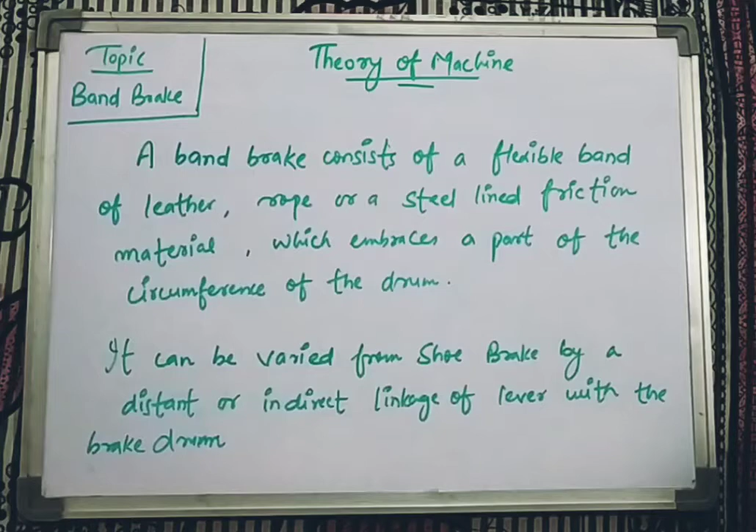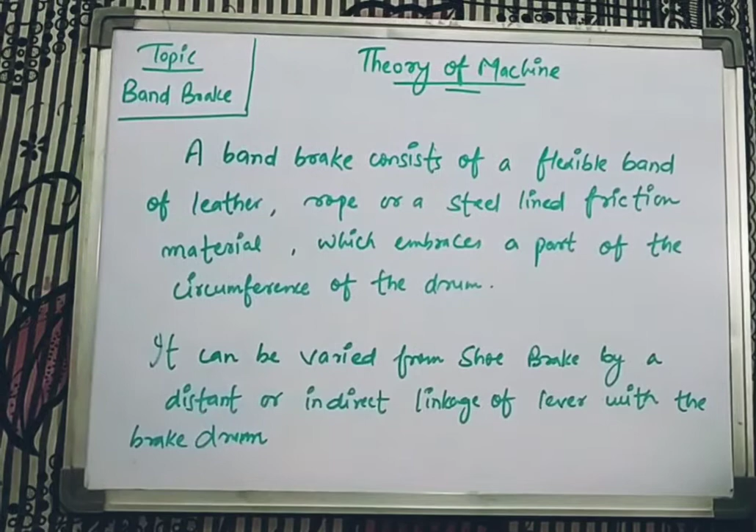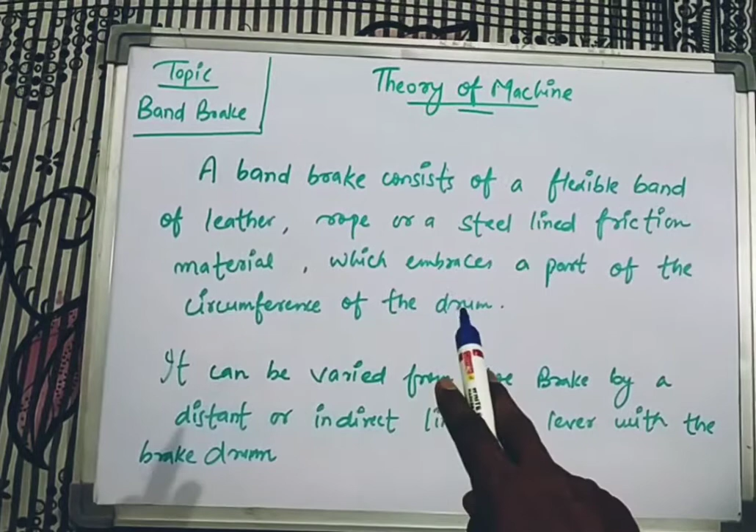So let's start with the definition of band brake. A band brake consists of a flexible band of leather, rope, or a steel lined friction material which embraces a part of the circumference of the drum.

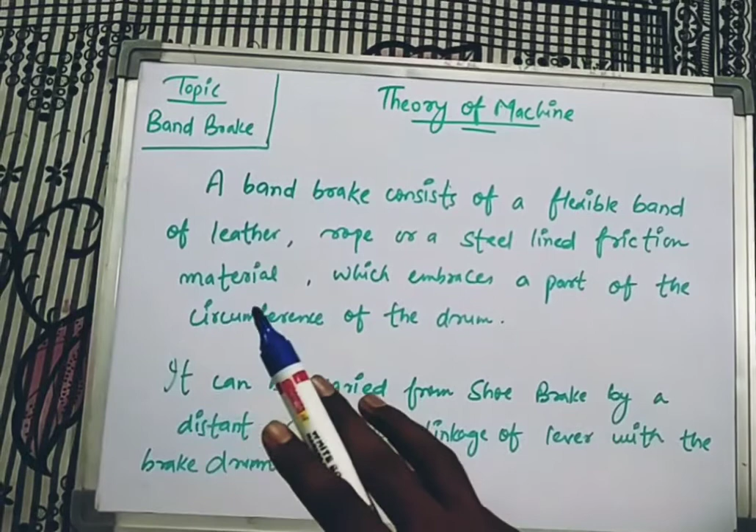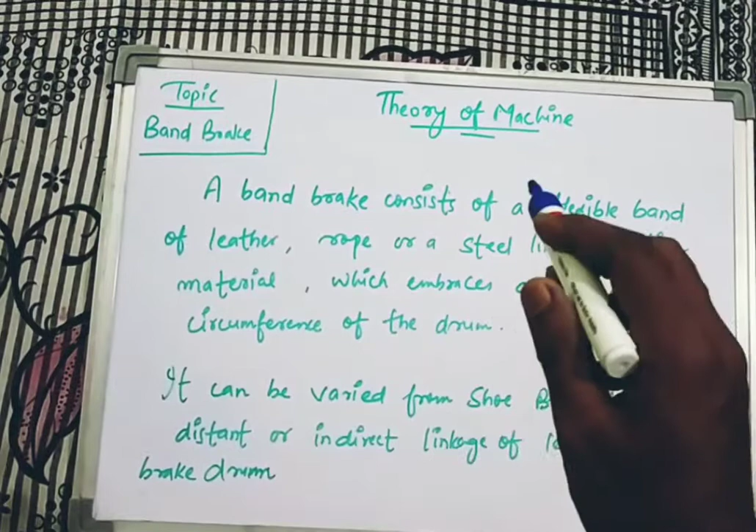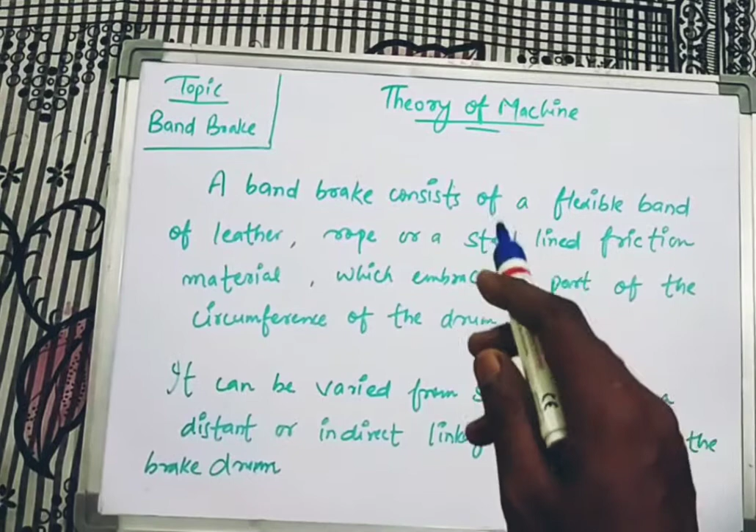In the previous class we already discussed the shoe brake. In the shoe brake there is a block and a wheel in direct contact, and when a load is applied on the lever above the block, this load presses the block and indirectly presses the wheel, and through that the brake is applied.

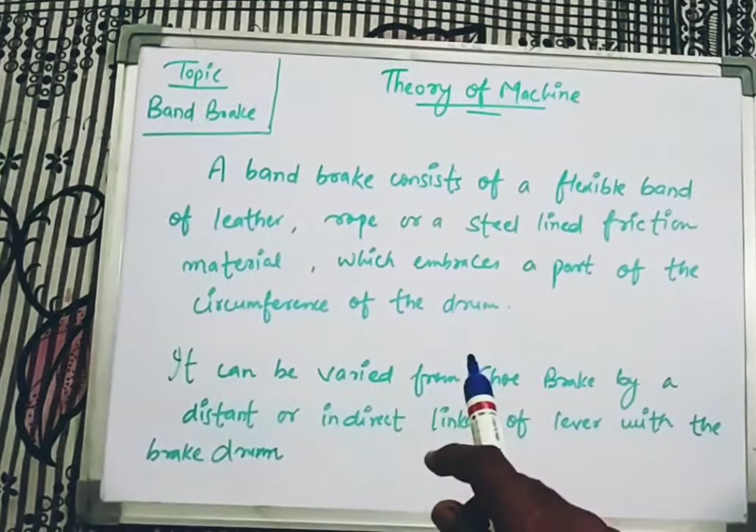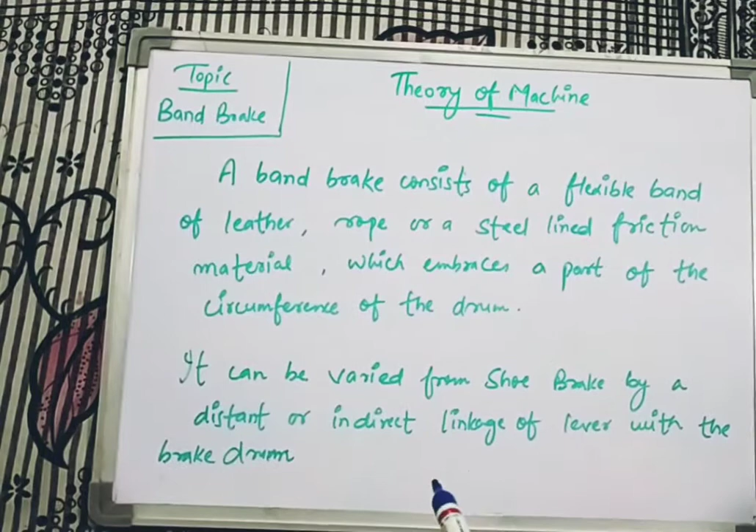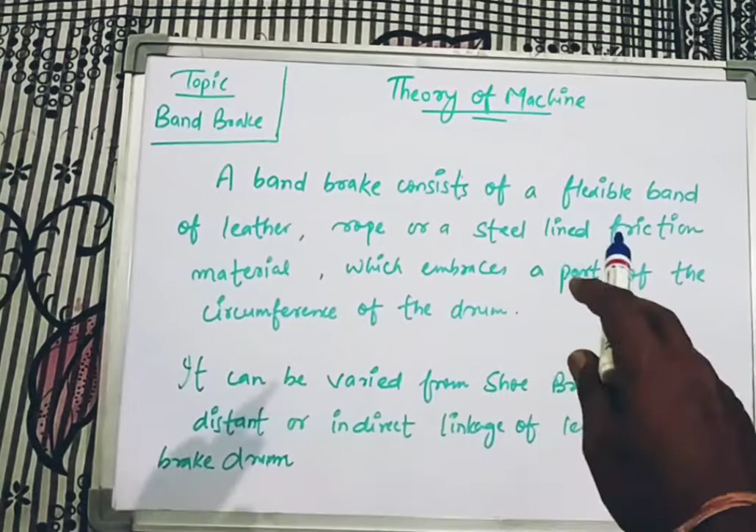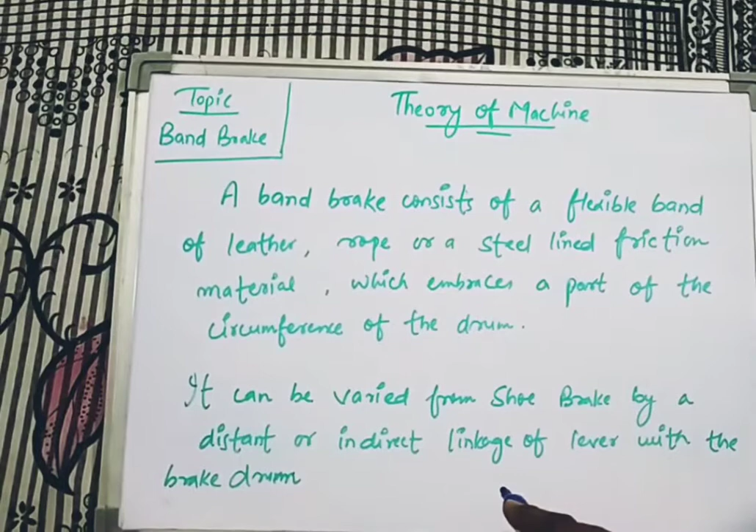In the situation of band brake there is a slight change - it varies from the shoe brake by distant or indirect linkage of lever with the brake drum. That means there is no direct linkage of brake drum with the lever; instead there is a linkage done by leather, rope, or steel lined friction material. The wheel and the lever will not be in direct contact, rather it will be linked through a rope or leather belt.

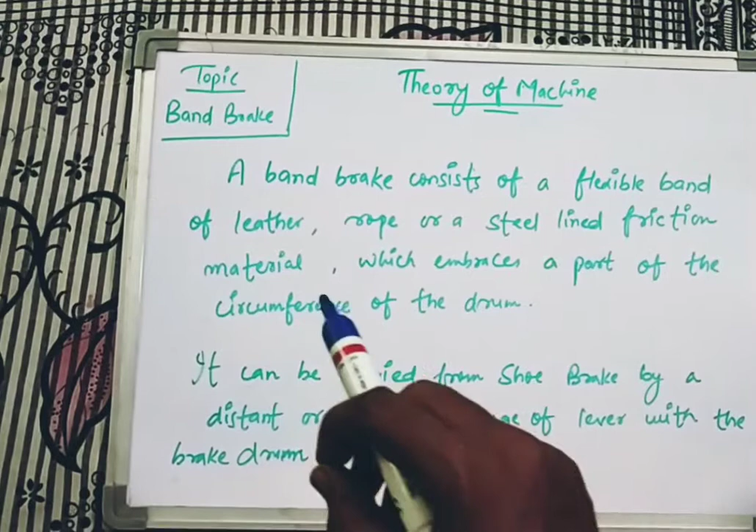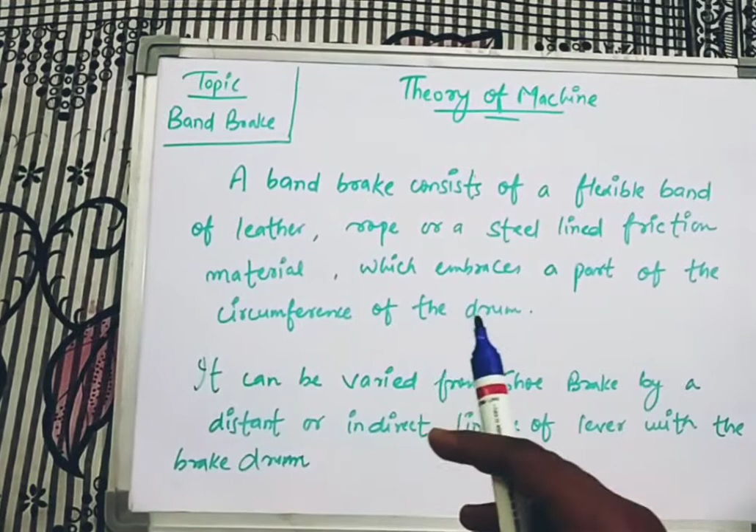So this type of arrangement is commonly known as band brake. In other words, if the wheel of any vehicle is not in direct contact with the lever and is indirectly contacted with the help of a leather belt, rope, or any steel lined material, this type of arrangement of brakes is commonly known as band brake.

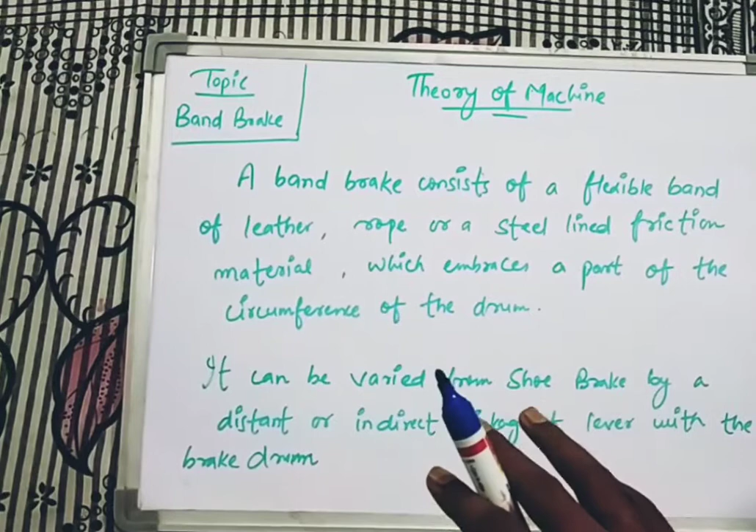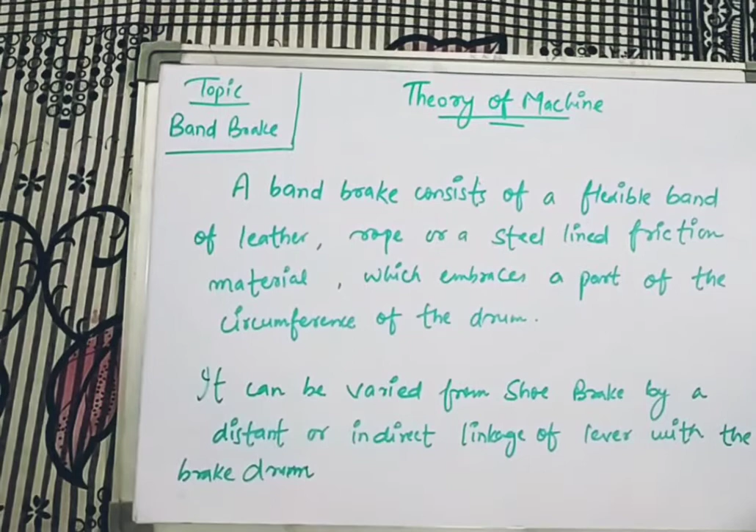So for more clarification, I will draw you the figure or arrangement of band brake. It will help you clarify the mechanism of band brake. Now coming back to the mechanism part of band brake, how this works.

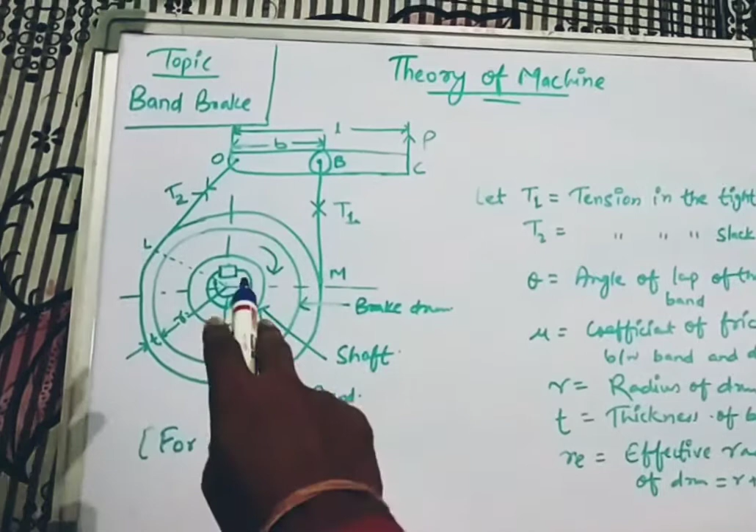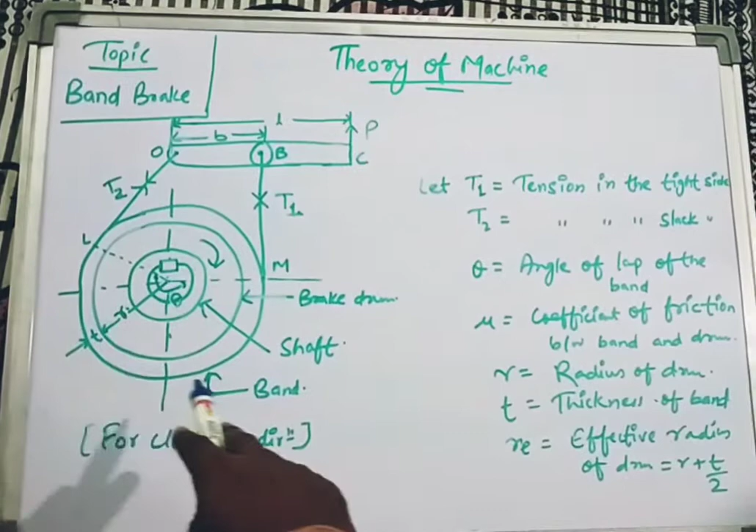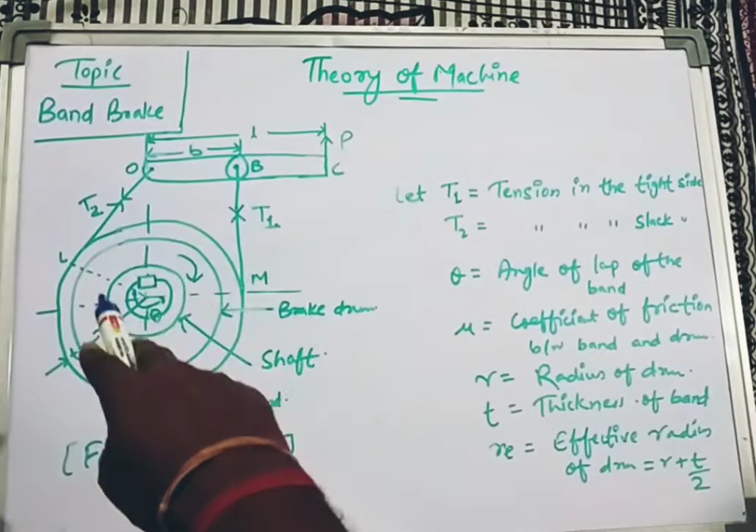This is a typical arrangement of band brake. This is the upper section, this one is a lever denoted by C. O is the fulcrum point, and the outer section of this wheel is brake band, and the inward wheel is the brake drum, inside which the shaft is aligned. There are 2 points attached with the fulcrum, one through point B, another through fulcrum point O. There are few nomenclatures given which I will discuss further.

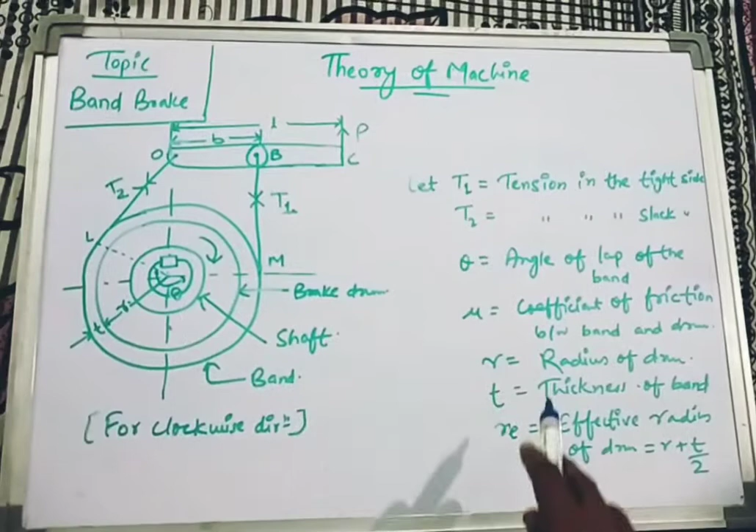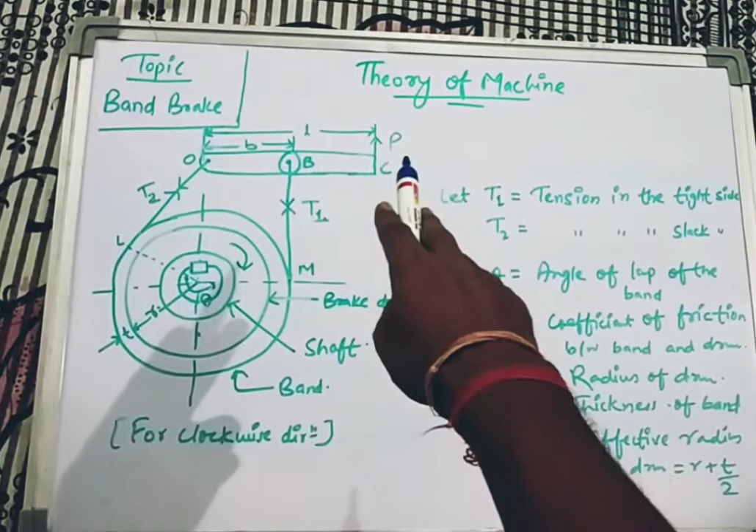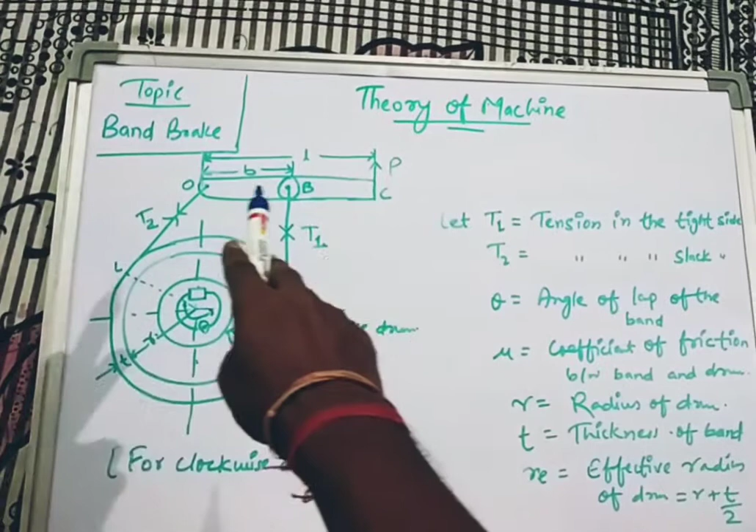Before starting the nomenclature, let me tell you how this band brake works. There is a load at the end of this lever denoted by P - the force being applied at the lever. When this P force is applied, this force travels throughout the lever at fulcrum point O, and since O is connected with this brake drum and also with the band, this ultimately tightens this band or leather portion.

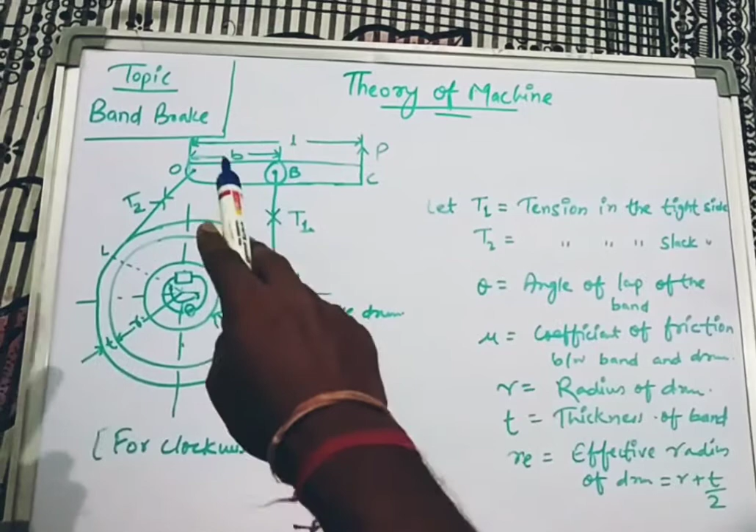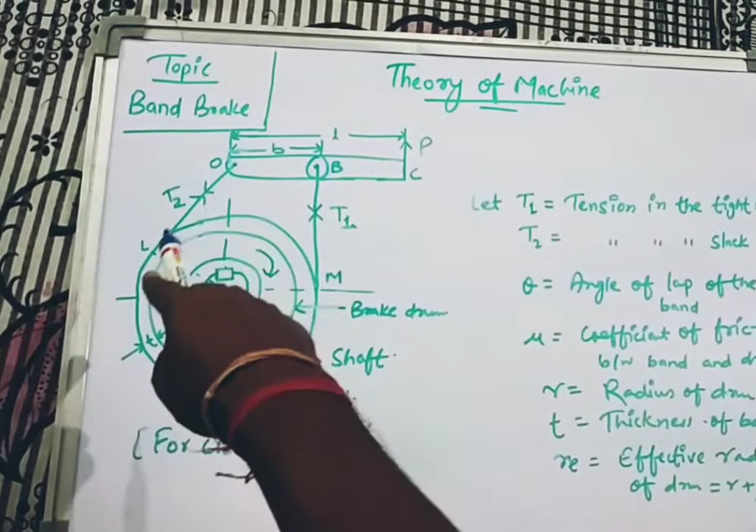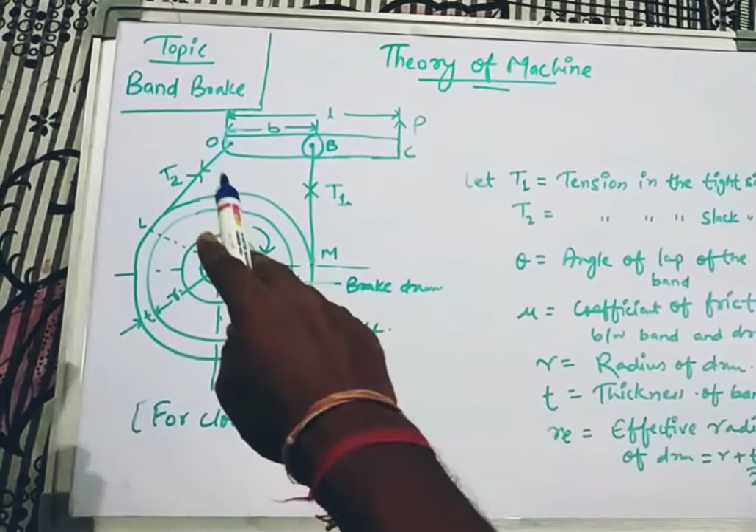What I mentioned is the tension, that is T2. This will ultimately tighten this side or slacken this side, or reversely slacken this side or tighten this side. So when the load is applied, tension is applied on that leather form - it can be either rope, leather belt, or any steel lined material.

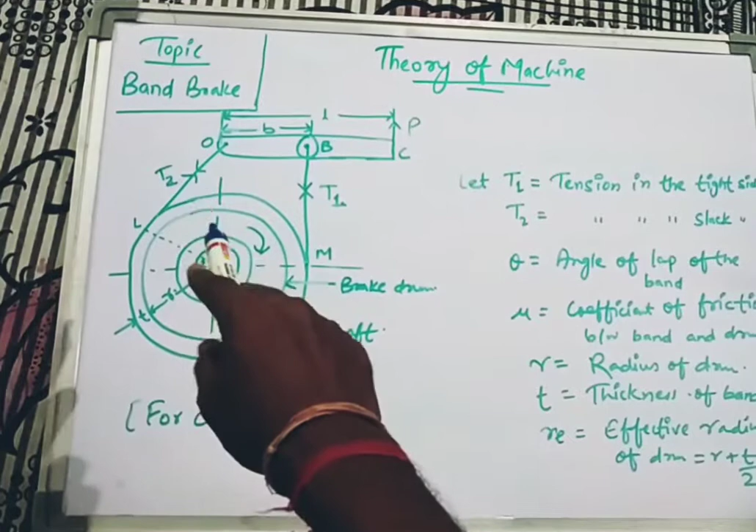Tension is applied on that position, and due to that the wheel develops a frictional force, since this is a friction material, so due to the presence of coefficient of friction, a frictional force is applied at the band, and due to this the brake will be applied.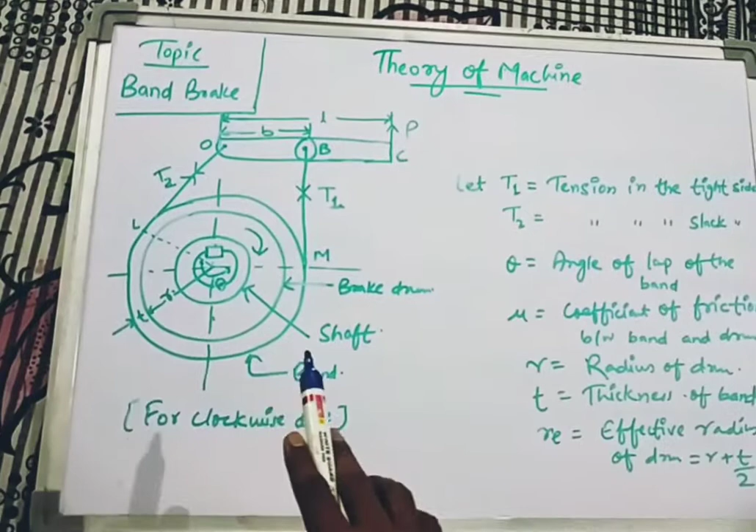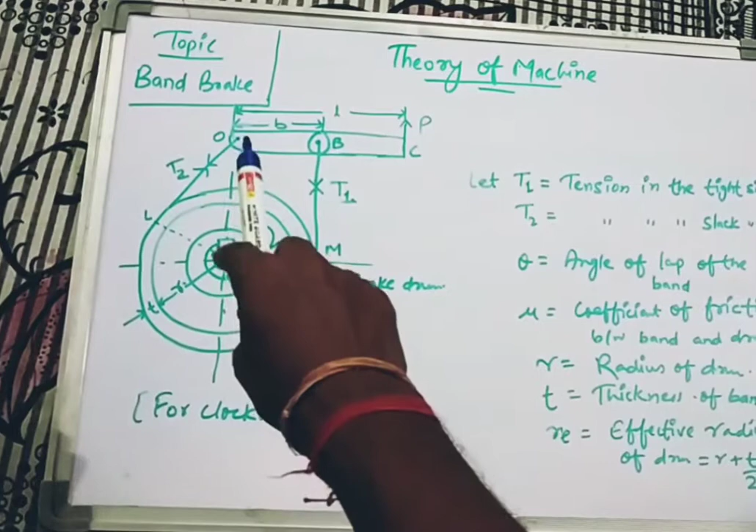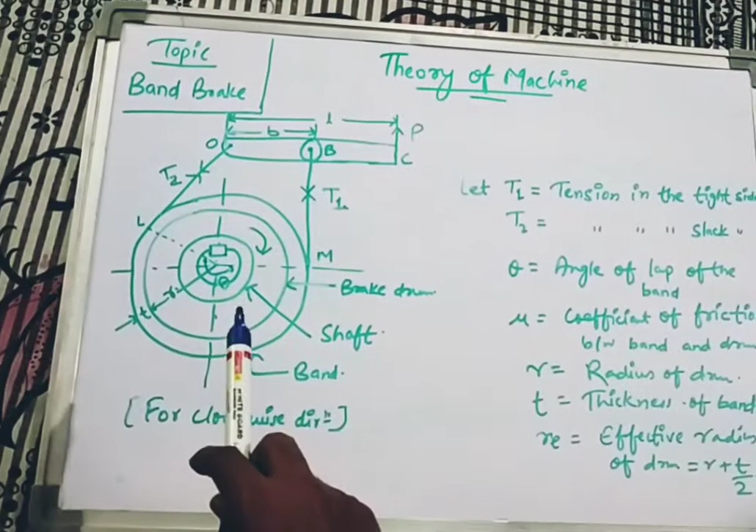In simpler words, when a force P is applied at the lever, this goes throughout to the fulcrum pin, since it is connected with a leather or rope portion, so tension will develop. This tension will develop a frictional force throughout the band and the brake drum, and due to that at the final position the brake will be applied. I hope you understand the mechanism portion.

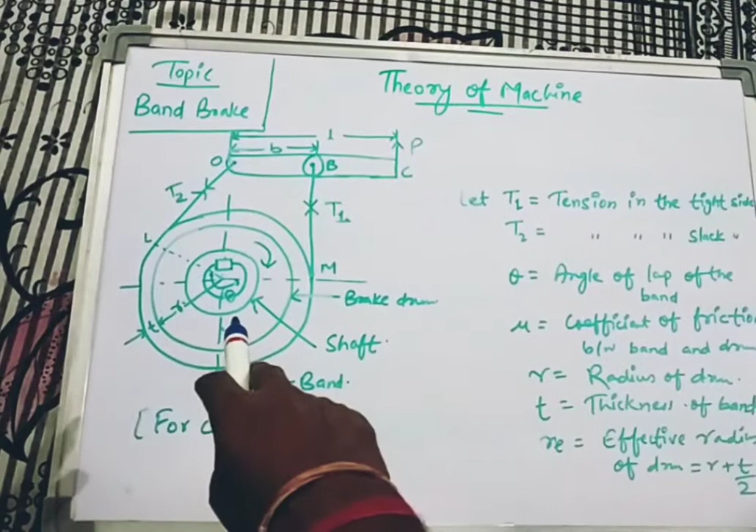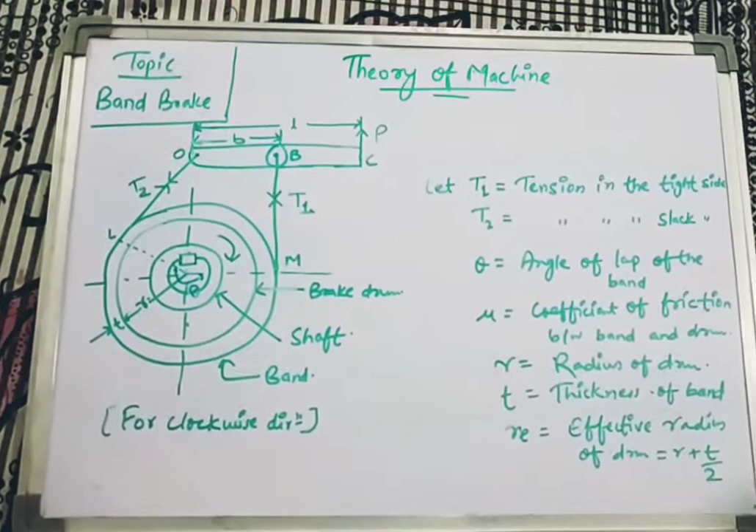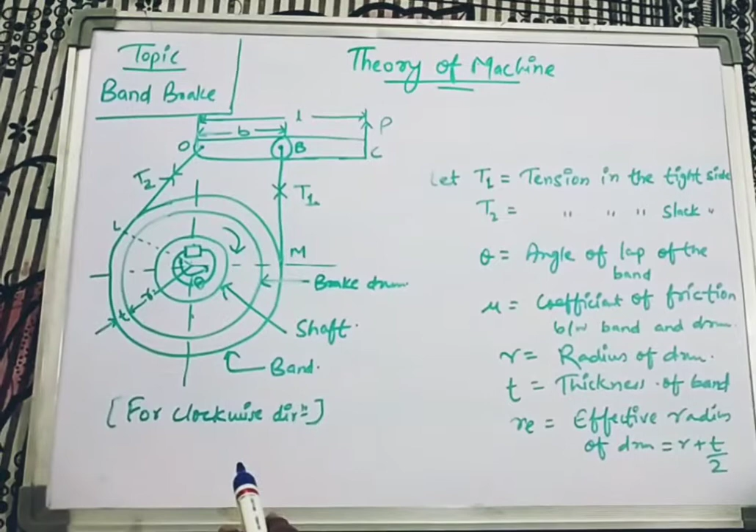Now let me tell you the few nomenclatures which I have mentioned and given in the figure. T1 is the tension in the tight side. T2 will be the tension in the slack side. Let us suppose T1 is mentioned here, so this will be the tight side and this will be the slack side. Since it is in clockwise direction, it can vary from a directional point of view.

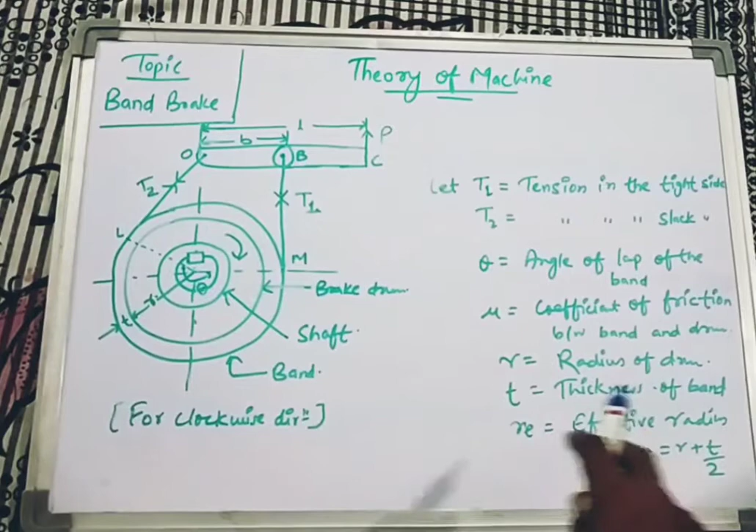Theta will be the angle of lap of the band, mu is the coefficient of friction between band and drum, r is the radius of the drum, T will be the thickness of the band, and re will be the effective radius, given by R plus T by 2.

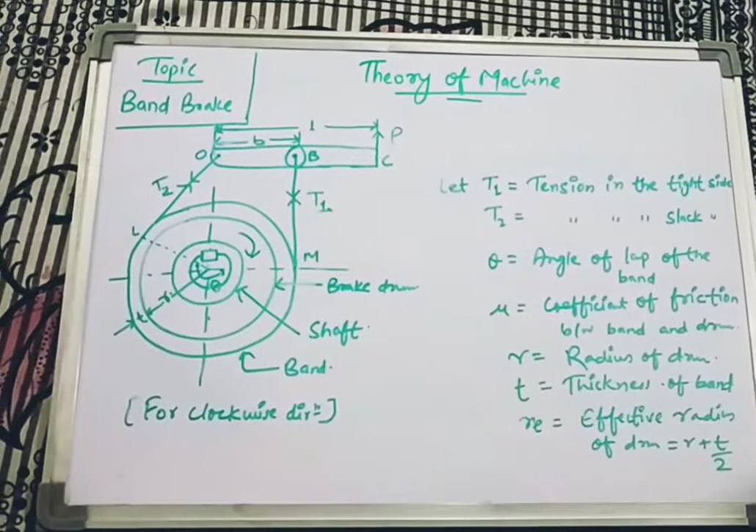So these are the few nomenclatures, and now we will discuss with the explanation part how this works. So now coming to the mechanism part.

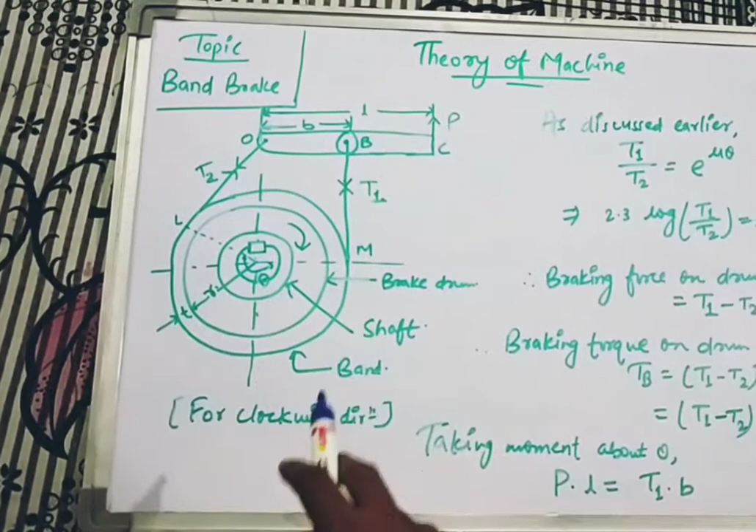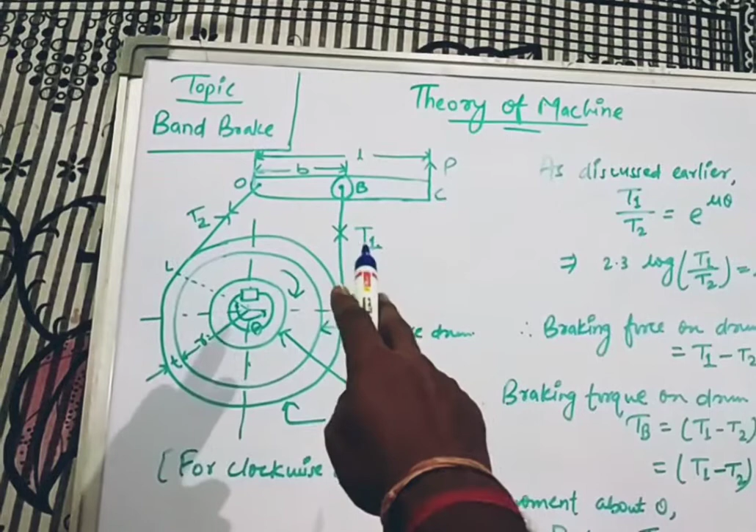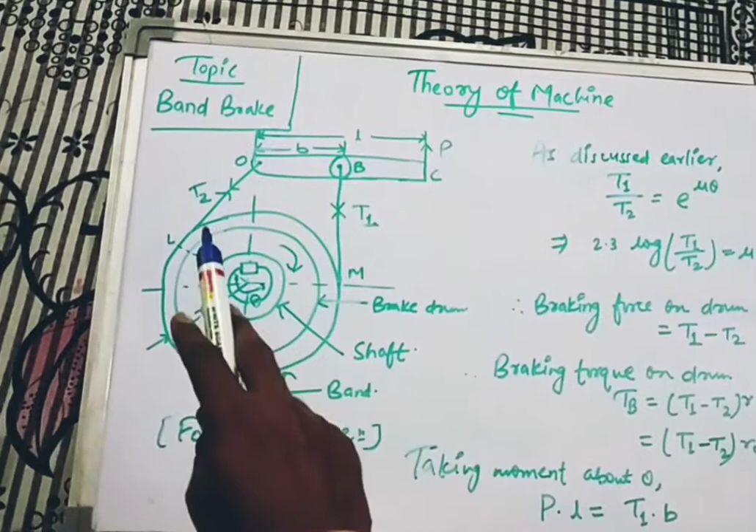So this is the band brake situation considering the clockwise direction. When we consider the clockwise direction, this side, denoted by T1, will be the tight side, and T2 will be the slack side. But if we consider the anti-clockwise direction, the situation will ultimately reverse. So now first taking the clockwise case.

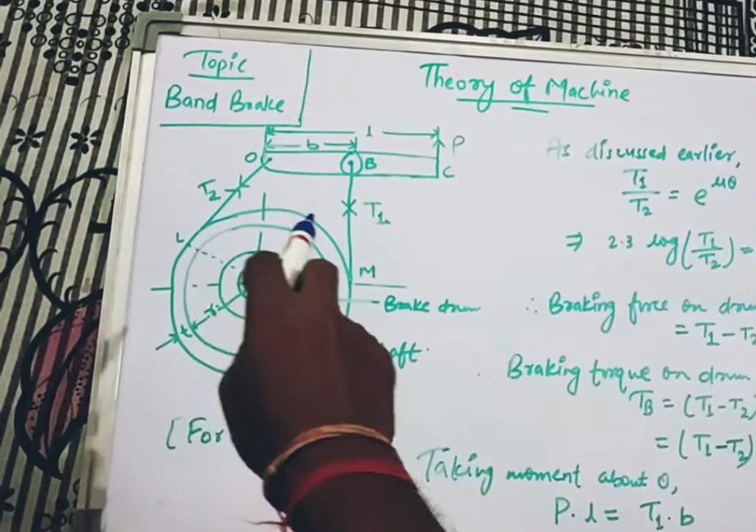I've already discussed that this load ultimately puts tension on this rope or belt, and this will implement a braking force on the band or brake drum, which will at last apply or amplify the brake.

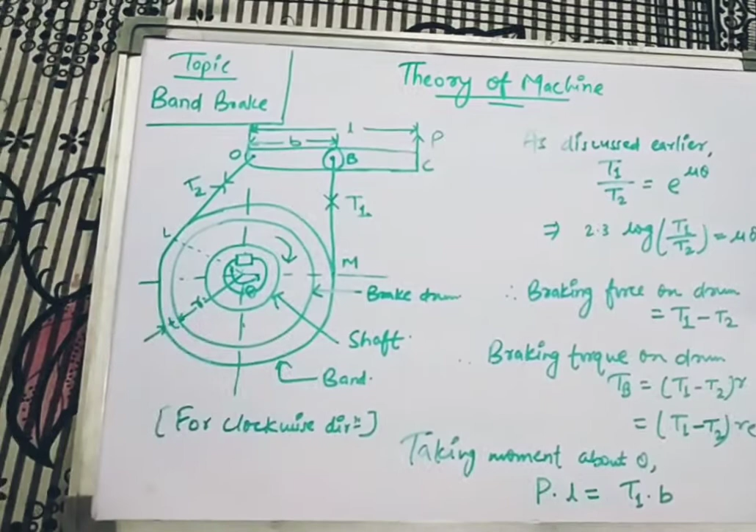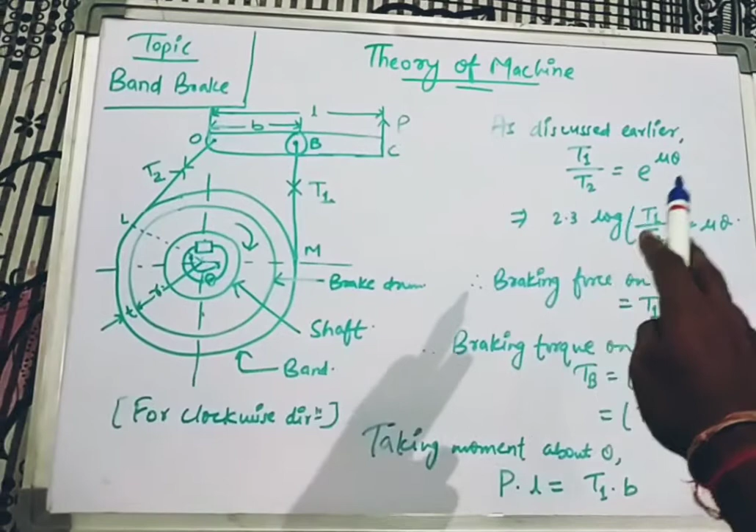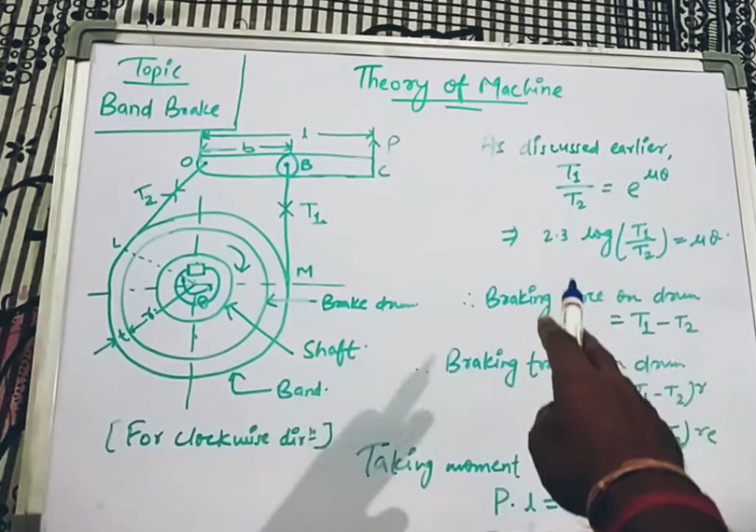As we discussed in the belt drive or rope drive, we got a formula, the ratio of tensions, given by T1 by T2 equals to e to the power mu theta. We have already studied about this in our previous chapters. On taking log both sides, we can get through this formula, that will be given as 2.3 log T1 by T2 equals to mu theta. I have already discussed about this in the previous chapters.

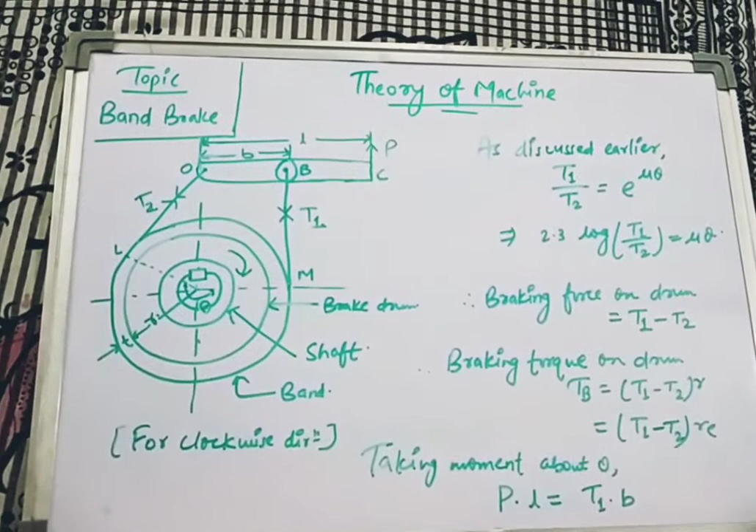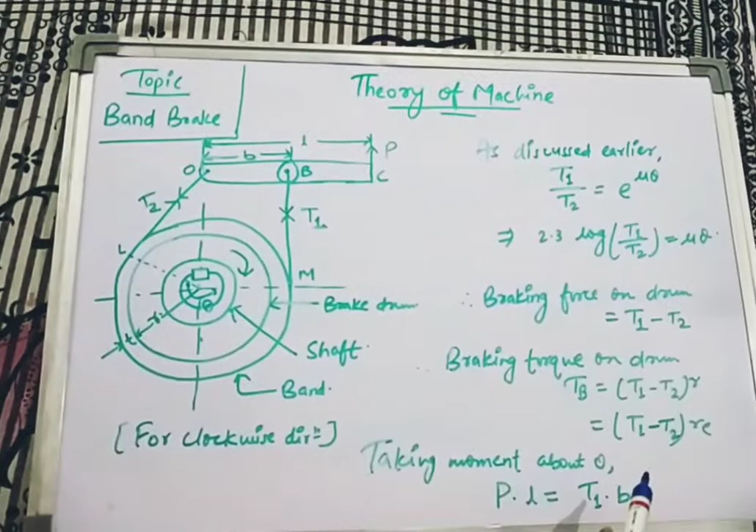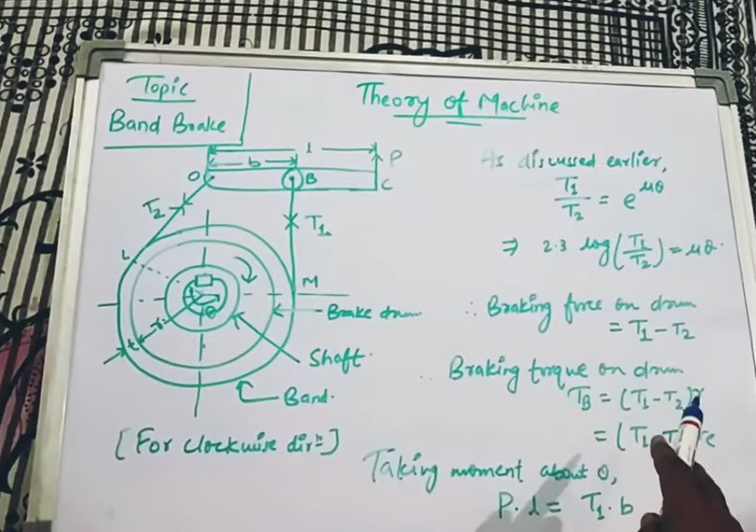So now if we have to calculate the braking force on the drum, that will be given by the difference of tensions between these two ropes, T1 minus T2. Similarly, the braking torque - torque is force into the radius or perpendicular distance. So that will be given by TB equals to T1 minus T2 into R, where R is the radius, or it can also be written as T1 minus T2 into re, where re is the effective radius.

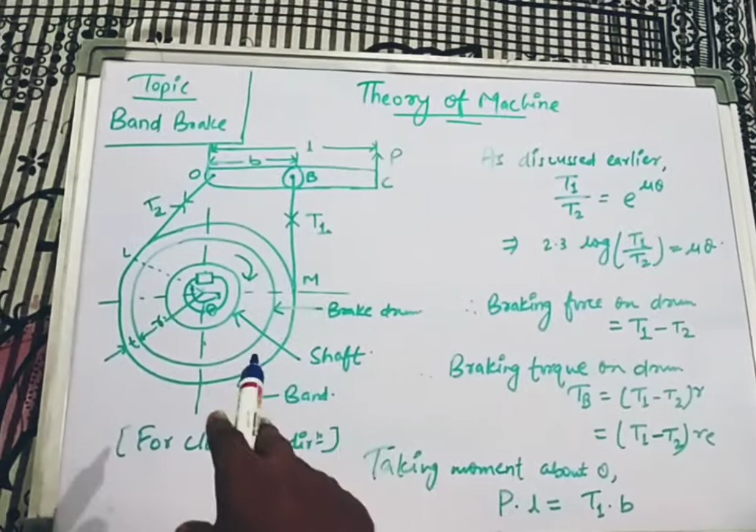In effective radius, I have already discussed that we consider the thickness of the band also. So if the thickness of the band is given, then you will go through this formula. If the thickness is not given, then you will go through this formula.

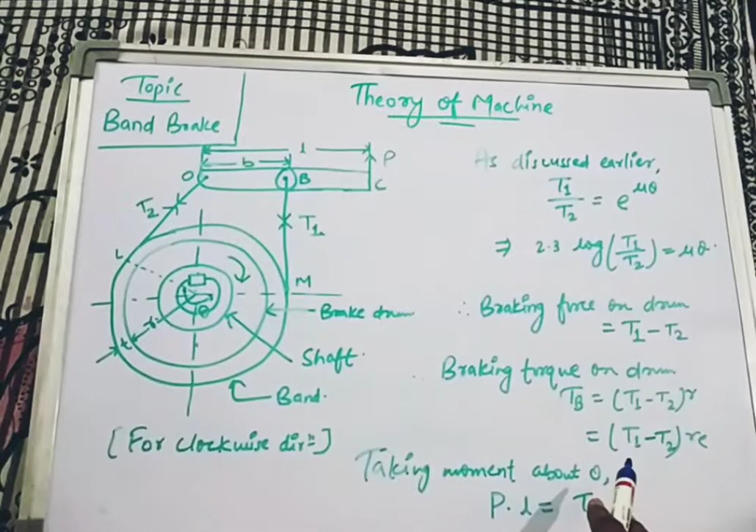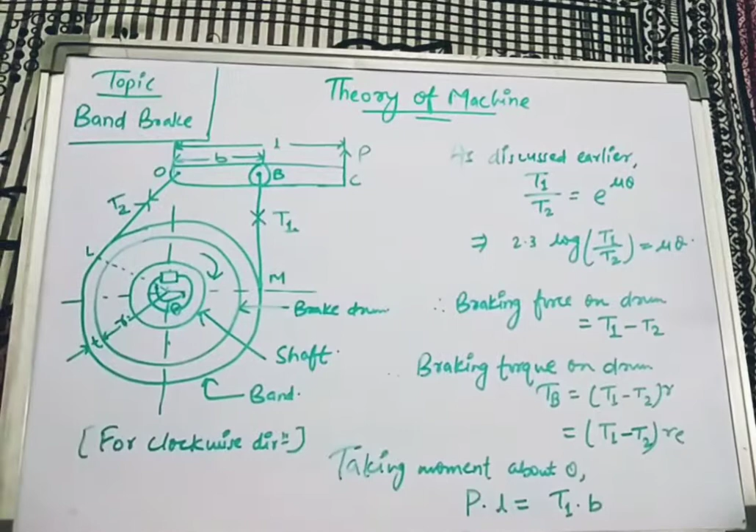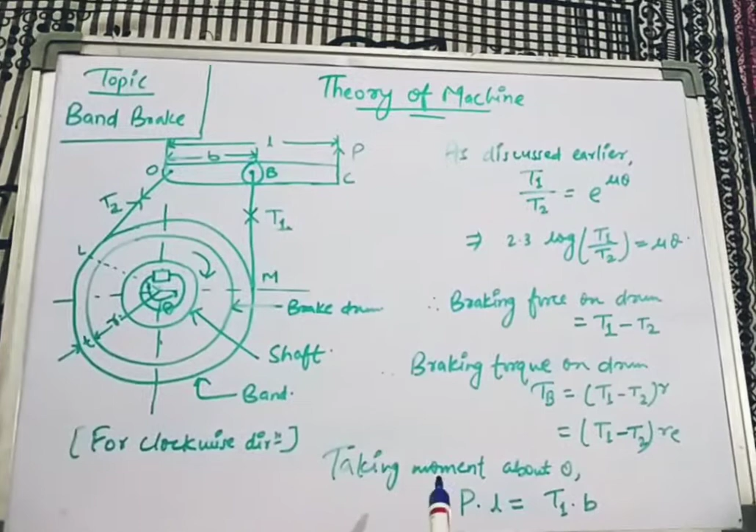So now the final point, how to calculate this P, the force, or T1 if sufficient data is not given. For that portion, as in our shoe brake, we did the steps of taking moment. So we'll do the same here also, taking moment about point O.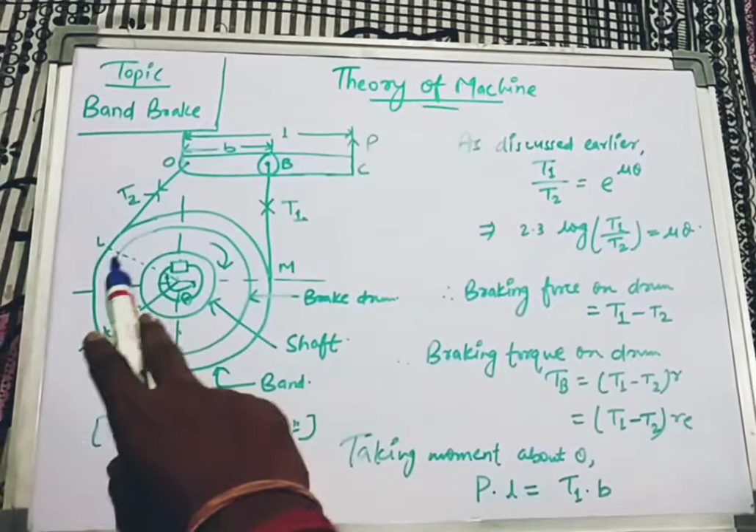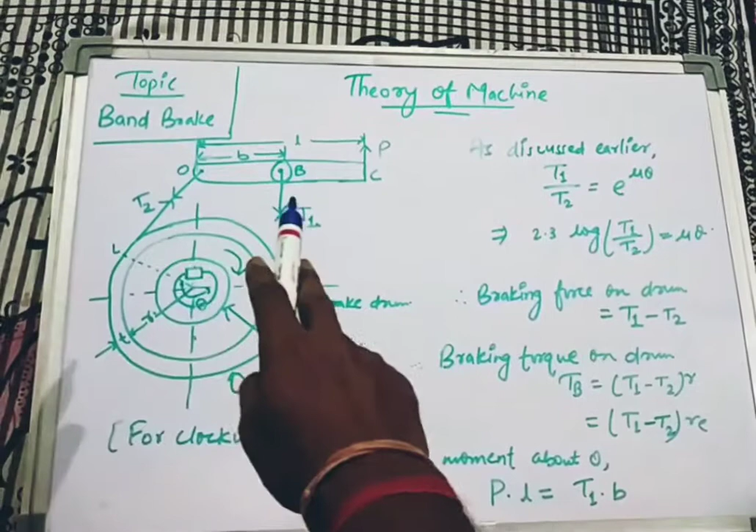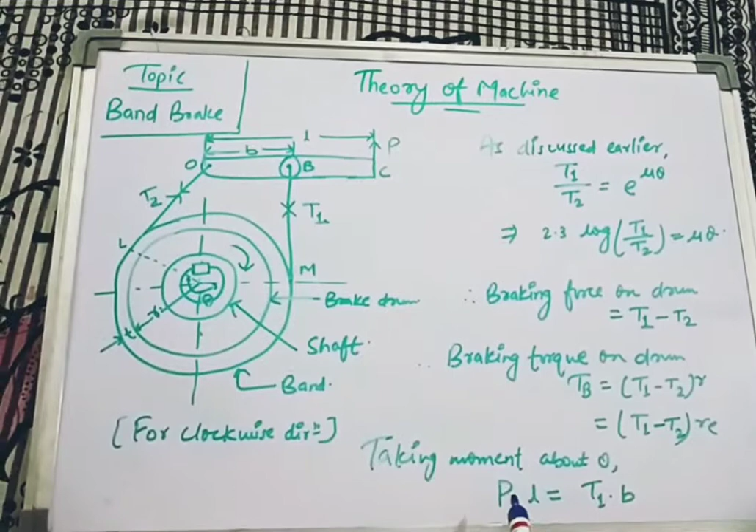On taking moment about point O, we get three forces actually, P, T1 and T2, but for T2 there is no perpendicular distance, so we will not consider this one. We will consider only T1 and P. For the force P, the perpendicular distance will be L, and for the tension T1, the perpendicular distance will be this distance B, since we are taking the moment about point O. So taking moment about point O, we get this formula: P into L equals to T1 into B.

So this is the whole scenario of band brake, and this is the case of band brake while we take the band or brake drum moving in clockwise direction. I hope you understand this.

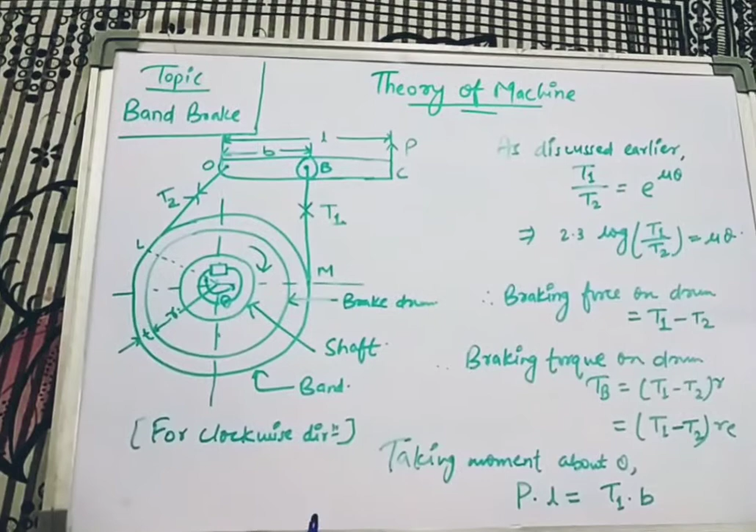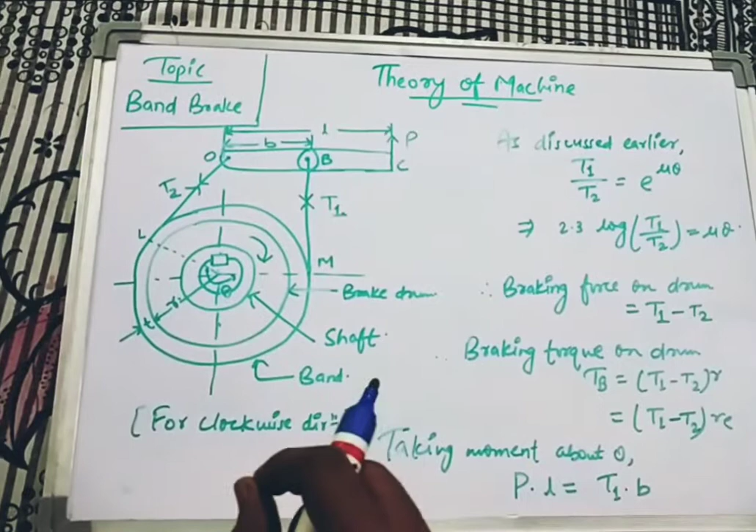Now let's get to the point if the band or the brake drum moves in anti-clockwise direction. There will be a slight change in the diagram and in the mathematical equation which I will provide you. So this is the case for band brake when the brake drum moves in anti-clockwise direction.

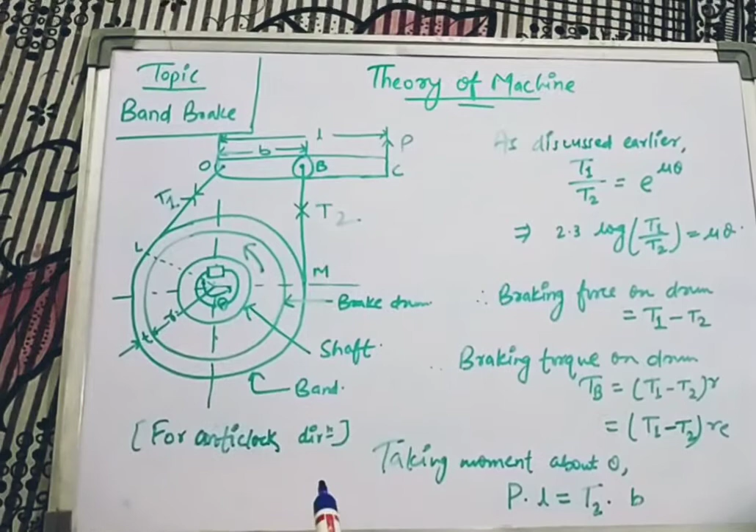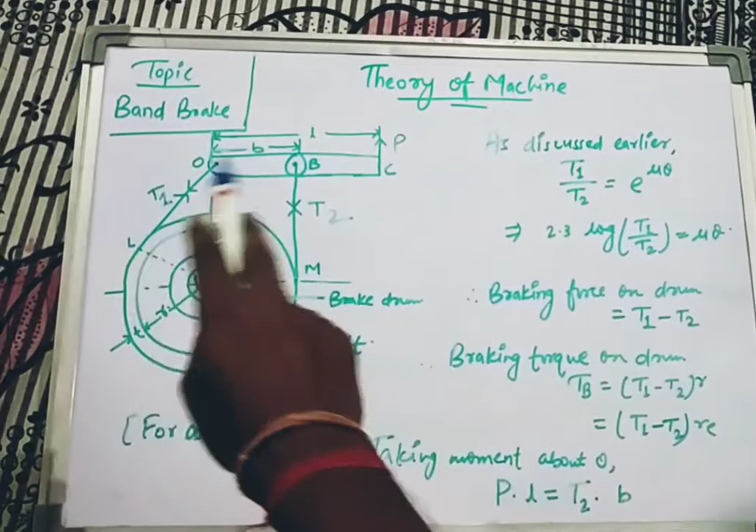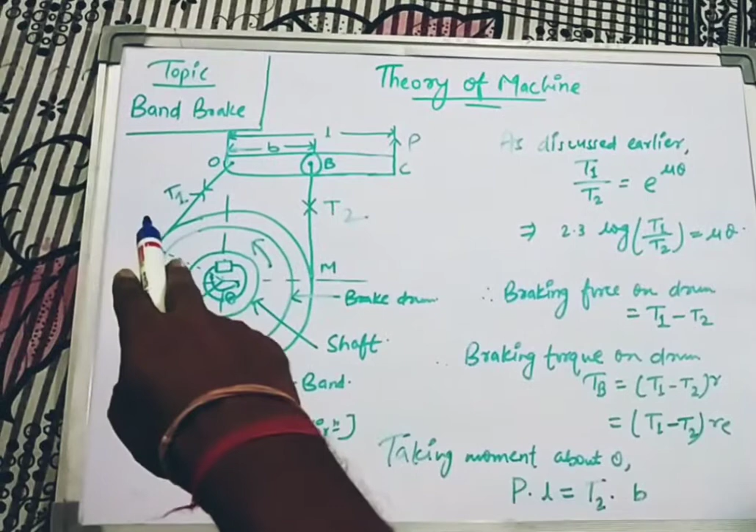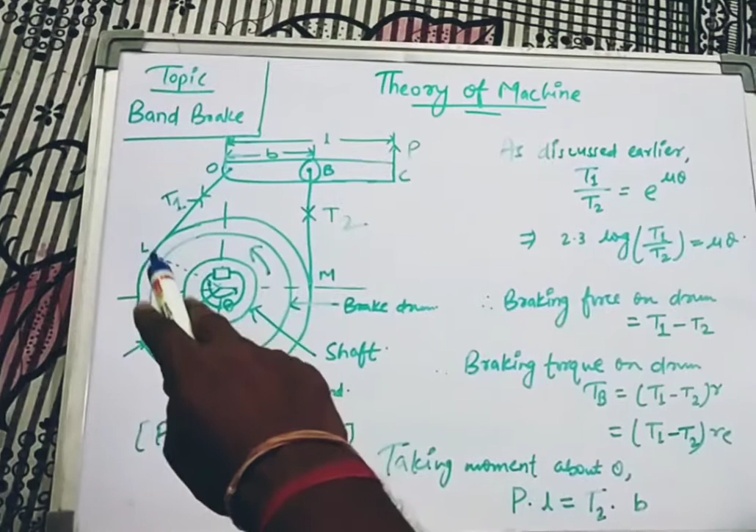This will be the same as clockwise direction, simply there is a slight change I have given in the figure - I have changed the direction to anti-clockwise, and I have changed the tension side. In the previous clockwise case, this rope gave the tension in the tight side, denoted as T1, and this one was T2. But here I have mentioned T2 here and T1 here, meaning I have simply reversed the cases. So this will be the tension of tight side in the anti-clockwise case, and this will be the tension in the slack side, whereas in the clockwise case this one was the tight one and this one was the slack one. So simply I have reversed the situation.

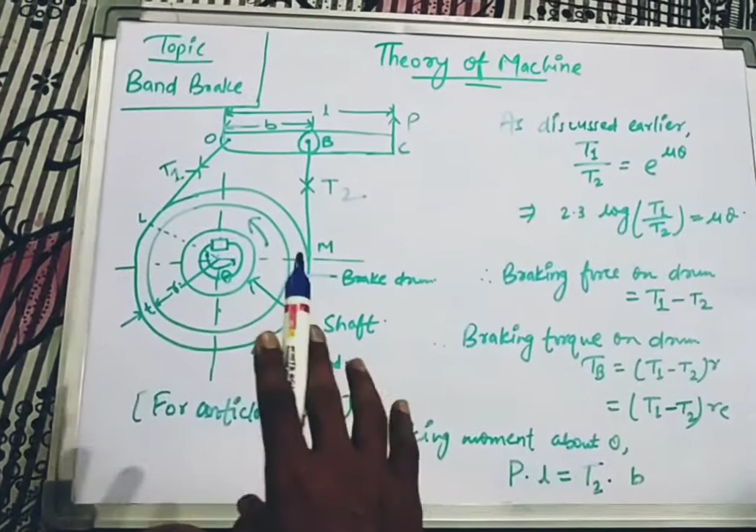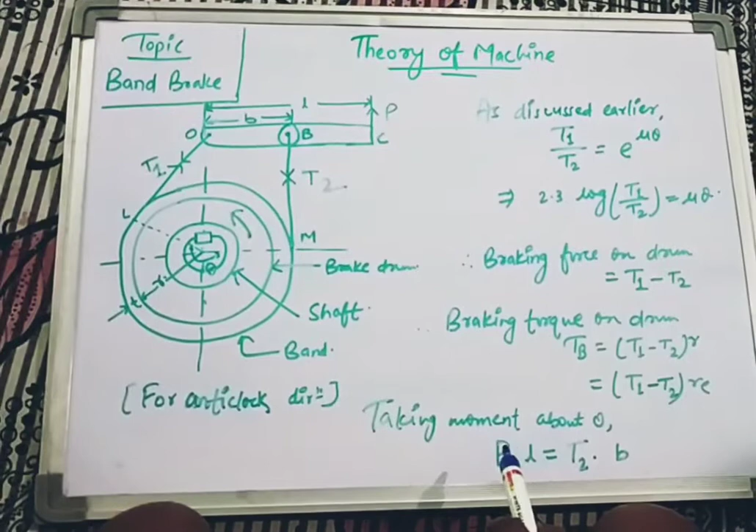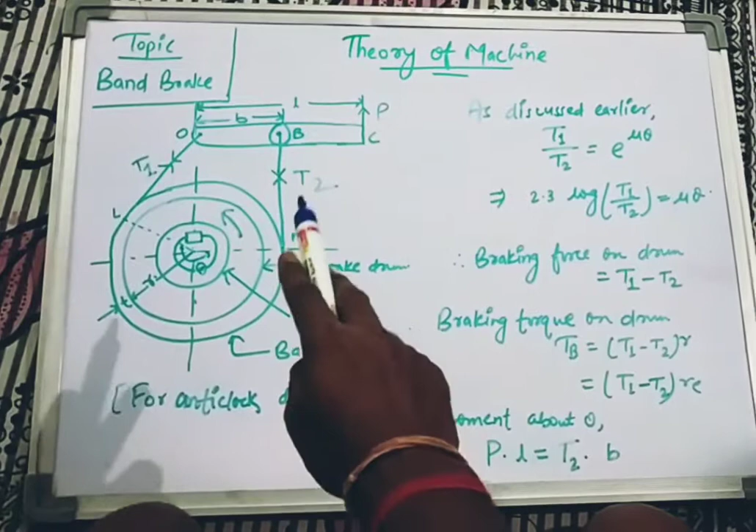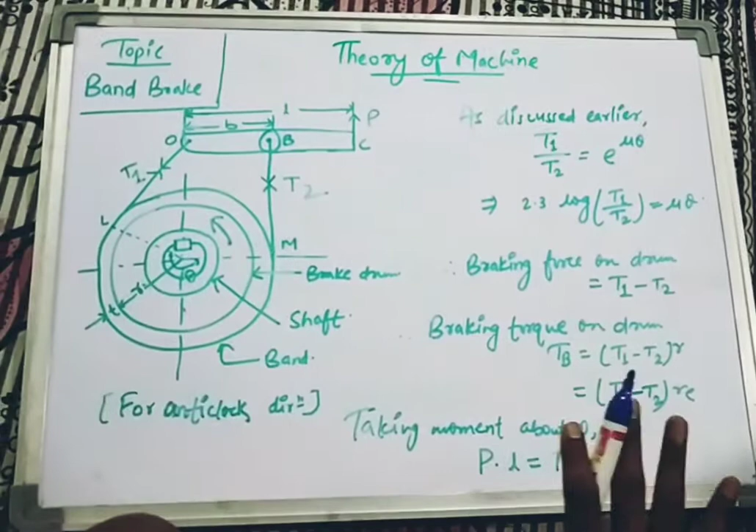Otherwise the formulas, let's discuss, all the formulas will be the same till here. Only there will be a slight change in the moment section - in the previous case we had P into L equals to T1 into B, but here since this becomes the tension in the slack side, this will be given by the formula P into L equals to T2 into B. Simply reverse or replace T1 by T2. This will ultimately give you the case of band brake in anti-clockwise direction.

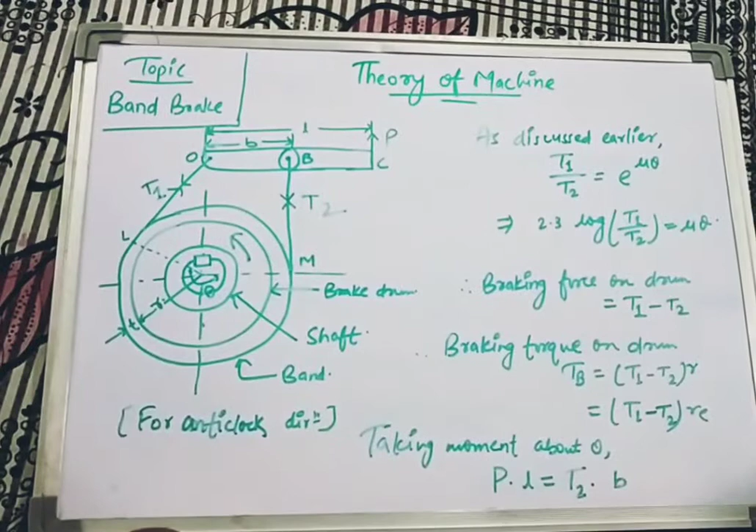That means band brake where the brake drum is moving in anti-clockwise direction. I hope you have understood the whole concept of band brake. So make notes and get it through. If you have any query, let me know.